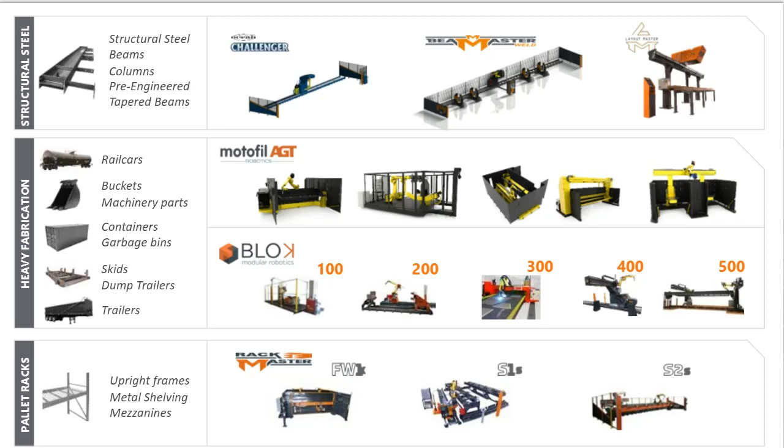Globally, we have over 1,000 work cells installed and running, and our primary install base is here in the US and in Canada. We also have systems that are installed and operating in Mexico and in Europe, Australia, New Zealand, and we also have a system operating in Japan. Currently, we are 85 plus employees based in the two facilities in Trois-Rivières and in Montreal, as well as a few here in the US, and we're always looking for new, good employees.

So with that introduction, I'm going to start into conversation about the LAYOUTMASTER. Again, our augmented reality solution for structural profile assembly. So unlike some of the other solutions you may have seen, we are not using robots to populate components onto a main profile. Material handling isn't the challenge for most of our customers.

In fact, we've been told the biggest challenge in fitting is finding people that know how to use a measuring tape and how to interpret a drawing. So we looked at the solution from a different way. Let's reduce the skill set requirement but maintain the flexibility that a human brings to the table when it comes to the fitting operation. And that's what drove the development and creation of the LAYOUTMASTER. What is a LAYOUTMASTER?

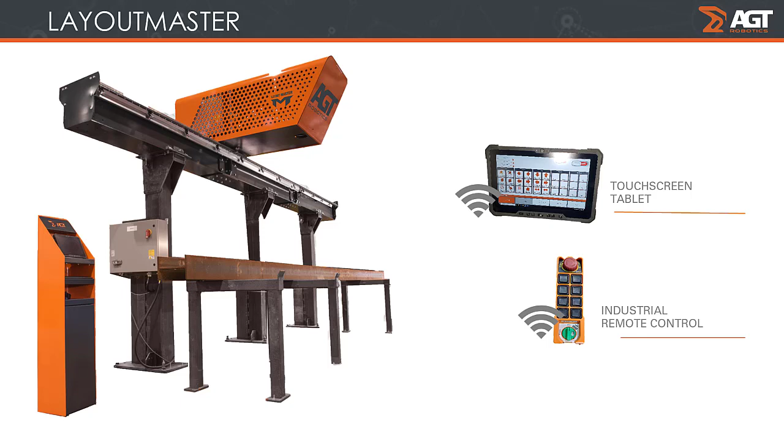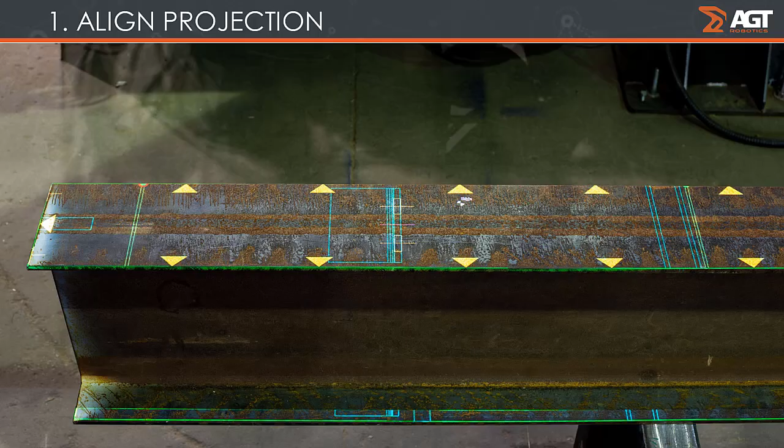So, how does it work? There are essentially 3 steps involved in fitting using the LAYOUTMASTER. The first step is to take the information from your SDS2 software package, import it into our Cortex software, and it creates the projectable information.

You set your beam profile in place somewhere within the projection area of the LAYOUTMASTER. It doesn't necessarily have to be precise, but in the interest of speed, if you can have the component located within a few inches of a datum location, that really helps.

Then the operator projects the registration information. He uses this to align the projector with the profile. You can see here this series of yellow triangles — this is the projected information. This is not painted on; this is actually the laser projection as it hits the surface of the material.

He's got the datum end located. He's got the side edges of the flange located. Whatever information is required to orient the projector to the main profile for the first face to be fitted, this is where that's being done. He very simply jogs the projector to make everything line up with his beam.

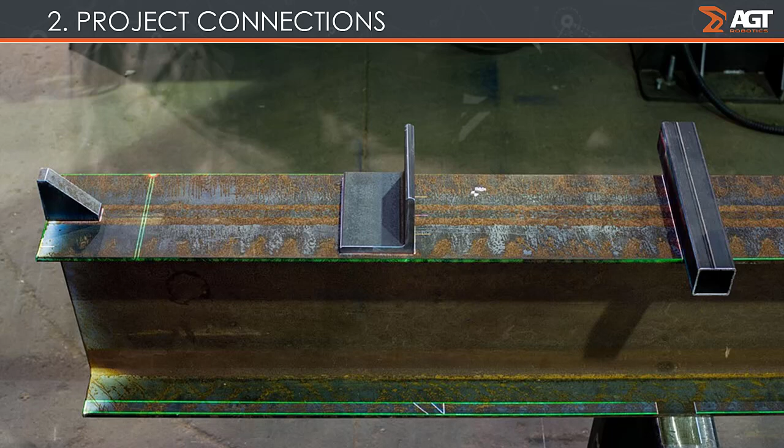Once that's done, he pushes the button on the operator control to say next accessory. You can see here how the information for the location of those accessories is then projected not only onto the workpiece, but also onto the accessories themselves. So we can see the landing point for these components, as well as the 3D images showing where the other lines should be in the real world.

Once he's got that information, he simply tacks the component in place and moves on to the next one.

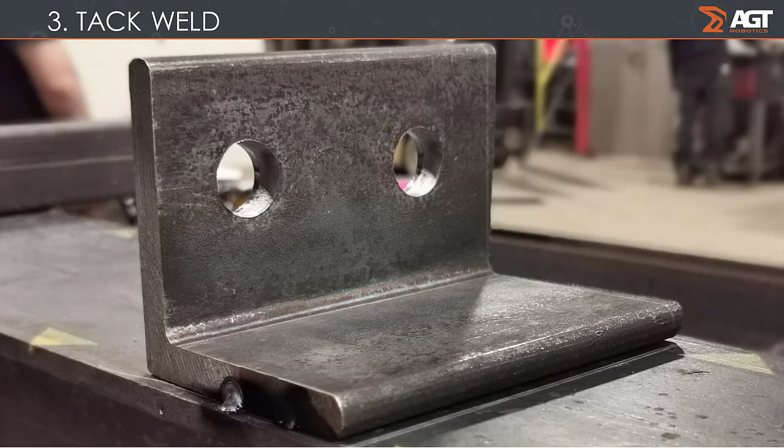The kinds of information that we can project include, as we saw earlier, the information required for locating and registering the main profile, whether that's a W profile, an angle, a channel, or an HSS tube. It doesn't matter, we can produce all of those edges and details in the projection.

We can also project holes, either shown or hidden holes, to give reference information for the operator. In terms of connections, we can show where the connections actually land on the main profile surface. We can show connections on connections, something that would be very difficult to do in the real world using a drawing and conventional measurement techniques.

And as we saw, we can also show all the edges of all the profiles to make sure that we've got very accurate placement of those components on the main beam.

For hole information, we can show the location of holes, we can show center lines of those holes, and we can also show center lines of hole patterns, again for accurate representation and reference information.

In addition to all that, we can show detailed part information. This really helps the operator make sure he gets the right part in the right place. We can show information like a part number, a description of the part, dimensions of the part, and even the physical weight of the part to make sure the operator has all the cues he needs to confirm he's got the right component in the right place.

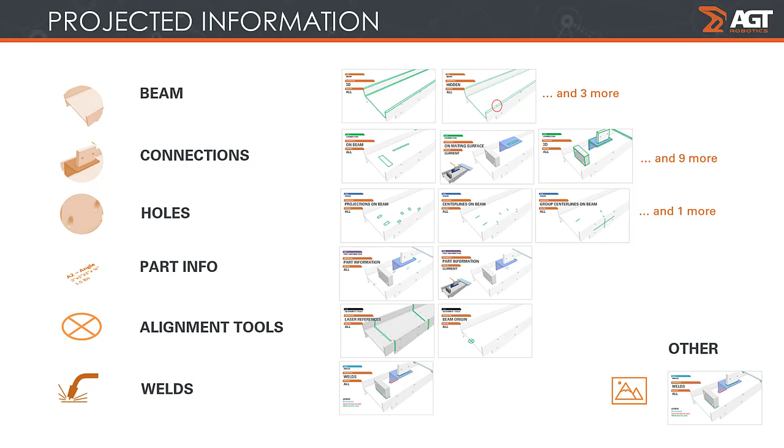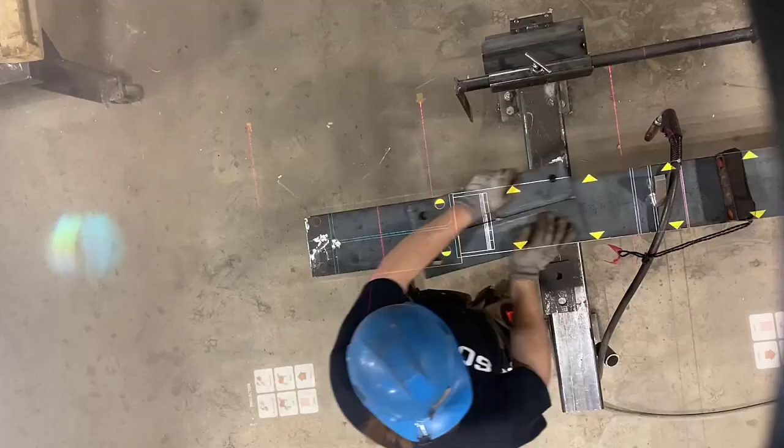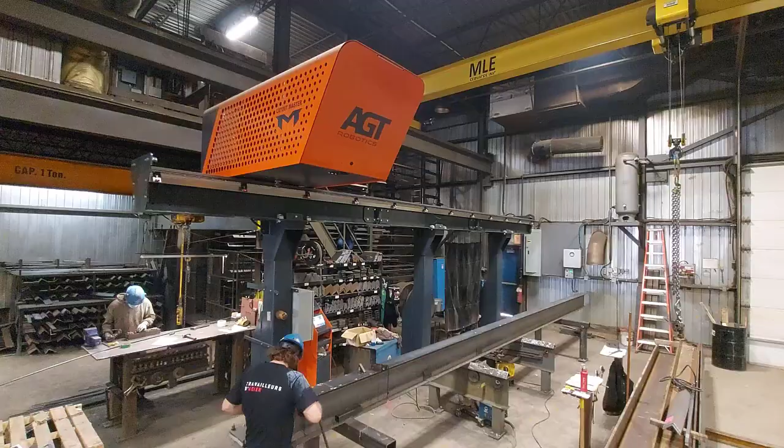Here we see a LAYOUTMASTER being used in a customer shop. Basically, profiles are being presented on trestles. An interesting capability of the system is the ability to lay out some of the accessory parts, in this case an end plate. The customer was able to lay out the center line for the location of the web and also the top line where it's going to hit the flange, and he didn't have to use a drawing or refer to any measuring tape.

He just did it all with the LAYOUTMASTER. Now he's got that in place, and he's already gone forward with locating and tacking the gusset. He's got an angle plate here, and again all he's doing is pushing the button to say next accessory on his remote control. The projector then identifies the location, projecting the information for that assembly, and he just has to get it located between the lines, tack it in place, and move on to the next one. It's a very simple, very fast operation with lots of visual cues for the operator to make sure he's got the part in the right place at the right time.

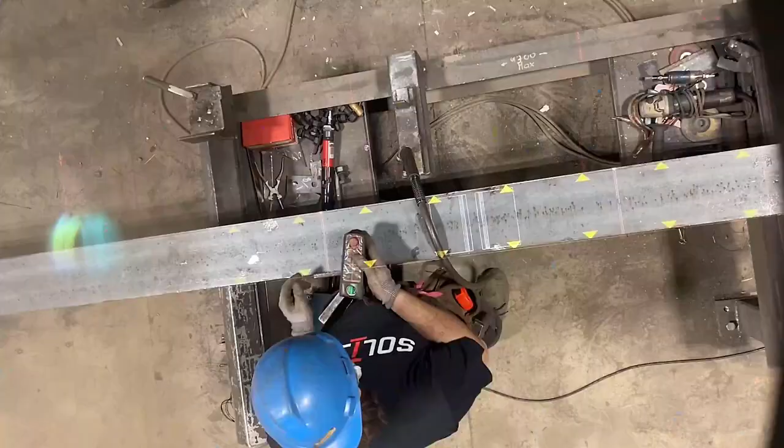This operation, where he's welding this angle in place - I actually saw him in a previous version of this video where the tack shrank and pulled the part out of place. He was able to visually see that because the entire component was highlighted by the laser projection. He basically knocked the tacks off and retacked it in the right position - a great way to make sure that you are sending properly fit components to the field.

And he just works his way down the beam profile until he has accomplished all of his fitting requirements. And that's pretty much it for the LAYOUTMASTER. So we'll jump right into the BEAMMASTER at this point.

The BEAMMASTER is AGT's solution for robotic welding in structural steel. We're kind of proud of the BEAMMASTER in that in 2019 we were awarded the Global Innovation Award by FANUC Robotics, our robot supplier. FANUC is the largest supplier of robotic welding and industrial robots on the planet. We were awarded this Global Innovation Award based on the unique capabilities of the BEAMMASTER to take the details from a CAD detailing package like SDS2 and translate that into robot path and robot welding parameters without the need for any human intervention.

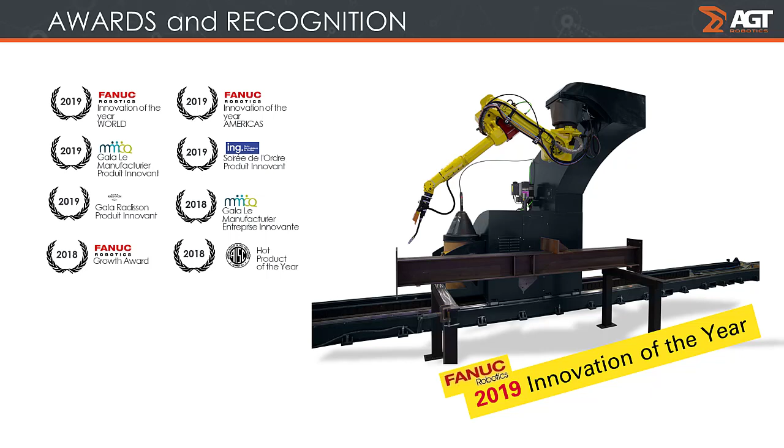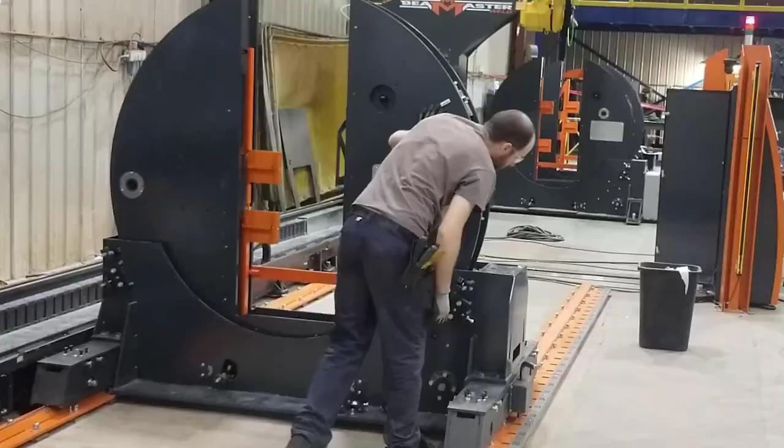Here's a quick video showing the BEAMMASTER at work. Essentially an industrial welding robot equipped with a welding package on a long linear rail and a set of movable rotators that allows us to present the customer parts in the horizontal plane for welding.

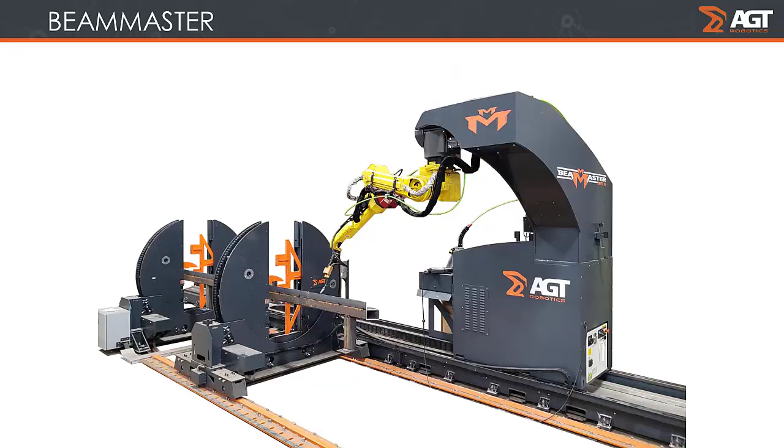So what is the BEAMMASTER? Well, as you saw in the video, we have a FANUC industrial robot equipped with a Lincoln 450 amp power supply, mounted on a long floor-mounted linear rail. It allows us to access long lengths of components and also gives us the ability to work in two zones, as we'll see as we move forward.

The robot is supported by a set of rotators, which allow us to clamp profiles up to 20 inches in the flange dimension and 48 inches in the web dimension, with a total of 10,000 pound payload per pair of rails. One of the rotators is fixed, and it's the datum for the beam welding. The other rotator is located on a movable rail, which allows us to reposition it to accommodate shorter or longer lengths of beam profiles.

It also allows us to move the rotator if our Cortex software package finds that the clamping is going to interfere with an accessory that needs to be welded.

This is a typical configuration for the BEAMMASTER. As I mentioned, there are two zones, which allow the robot to work unimpeded in one zone while an operator is unloading a welded part and reloading a fresh part to be welded by the robot when complete. This way, the robot is constantly working and we're not waiting for an operator to load or unload components.

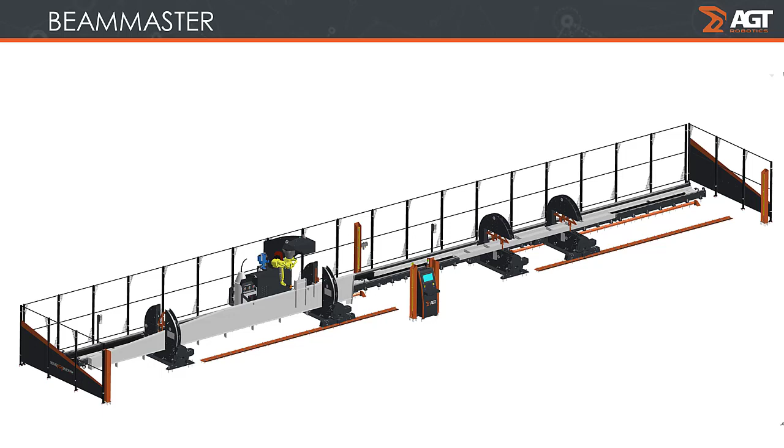There are four pretty simple steps to operating the BEAMMASTER. Number one is exporting your CAD details to our Cortex software. It's essentially a few mouse clicks to set up the export format, and once you hit OK, it's exported to Cortex.

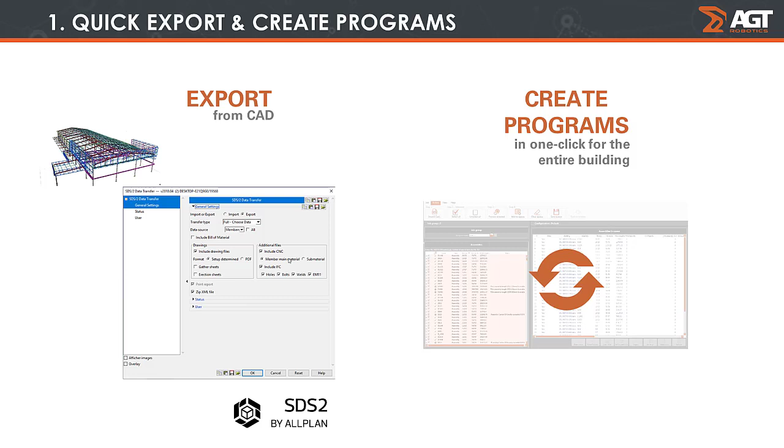In this case, we're showing exporting an entire building, and that can be done in one click. All the details from that building can be exported at once, and Cortex will go to work analyzing the beam content of that building and start creating the welding programs.

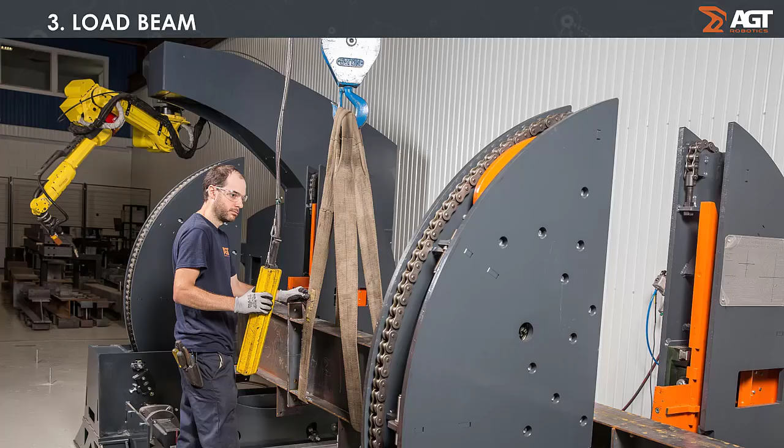The operator then selects one of those programs from a drop-down menu on his operating station, picking one that matches the assortment of beams lined up to be welded. He loads that beam, either vertically, as seen here with the rotators oriented in this direction, or horizontally using a combi lift, forklift, or a horizontal conveyor. Once he's loaded it up and clamped, the robot goes to work.

As I mentioned earlier, all of the welding is performed in the horizontal plane, and that's what we're using the robot to do—orienting the part on four different faces during the process of welding the component.

So what makes the BEAMMASTER really unique is AGT's Cortex solution for no programming. Cortex is a software package we've been developing over the past 10 years to automatically generate the programs a robot needs to weld one-off components, if required.

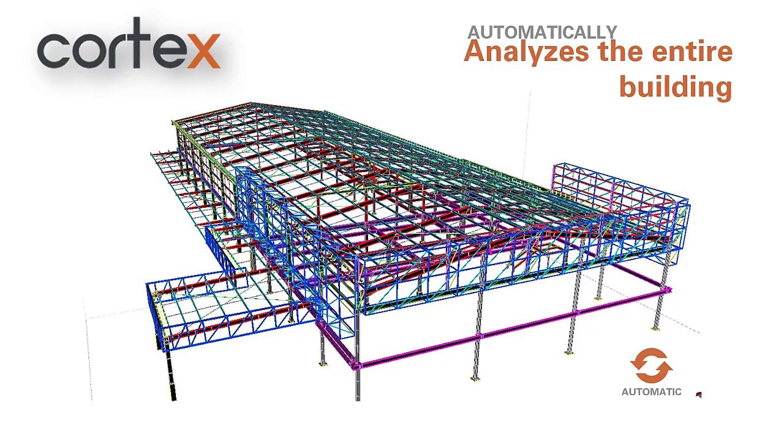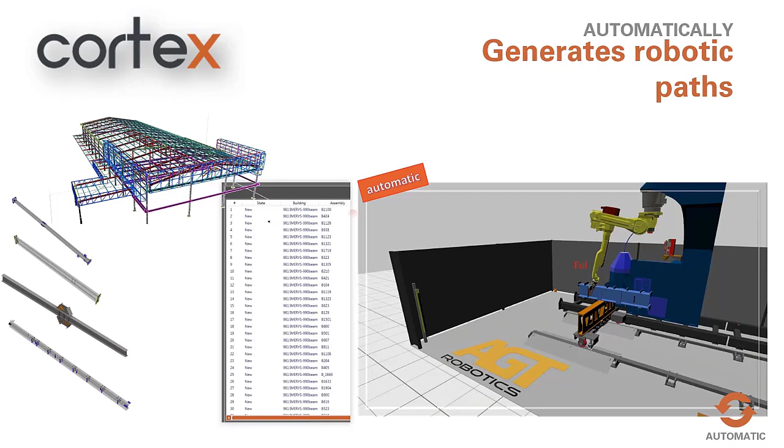In this short slide transition, we'll show you how that works. We automatically analyze the entire building. Once the export from SDS2 has been made, we identify all the unique parts in there. We discard any parts that don't require welding, or that are too small, too big, or too heavy to go into the BEAMMASTER. Once we've selected the appropriate candidates, Cortex goes to work.

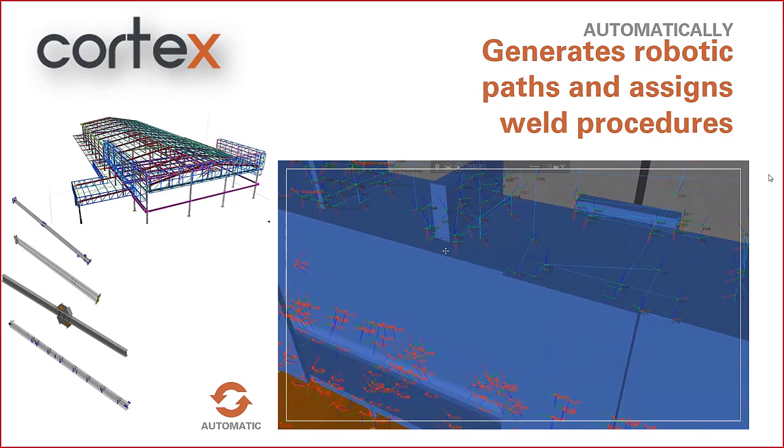Cortex starts generating simulations for all of the parts in that building. This looks like a sped-up video, but it actually represents the simulation process the robot goes through to create the robot paths and welding parameters. Essentially, it's doing in minutes what would take many hours by conventional methods.

Once it's done, it generates point clouds—collections of positions for every beam in that building—and creates a real-time simulation you can view after the program's been generated. These programs are what's uploaded to the robot controller, and the robot plays them back in production.

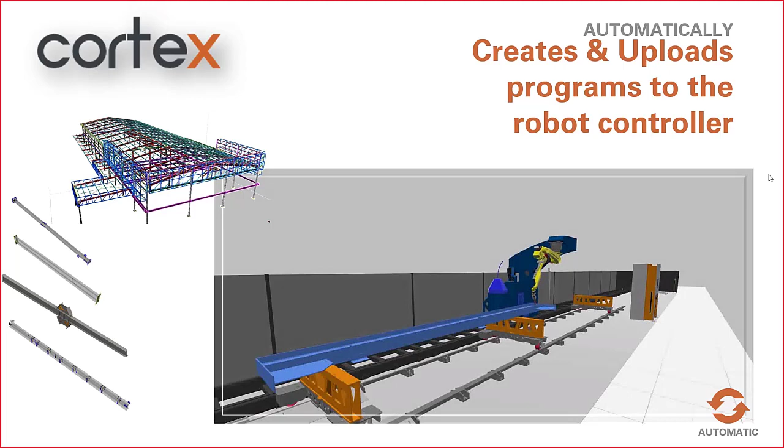This also makes sure that we have a good idea of what the real time is going to be to weld a part prior to actually producing it.

So we talk about Cortex as the no-programming solution—no human required, no problem, really. As opposed to the easy-program or offline programming solutions you may see out there, we feel Cortex represents the only true no-programming solution. This is important because we don't want you to trade a skilled welder for a skilled robot programmer.

We're hoping that we know that we can teach your existing resource to be able to use the system effectively and capably. So the progression in terms of programming has been from manual programming, where we're using a teach pendant to program point by point, to what we call assisted programming or lead-through programming. This is being used on smaller parts where you might have repeats of 6 to 10 or 20, where the programming time investment is worth it.

Offline programming takes the programming requirements from the teach pendant and puts them into a computer somewhere at a desk outside of the robot work envelope. This is great to allow the robot to continue to work while you program new parts, but it isn't much faster than the manual programming method, so it's still a laborious process.

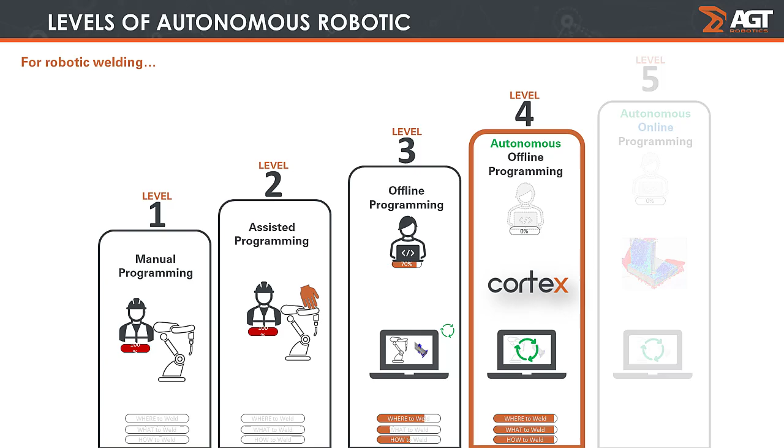So now we're going to talk a little bit about fitting and welding. What happens when you combine the two and create a complete fitting and welding solution? When you add a LAYOUTMASTER to a BEAMMASTER, you end up with an integrated fitting and welding solution that can allow an operator to do the same kind of work as up to 8 fitters and welders. The two systems work in conjunction together to make sure that one operator is able to produce the fitting requirements, the robot's generating the welding requirements on a single shift of between 6 to 8 operators.

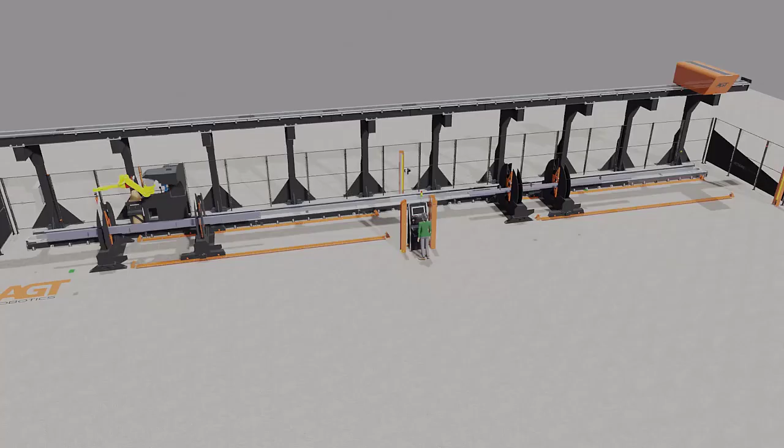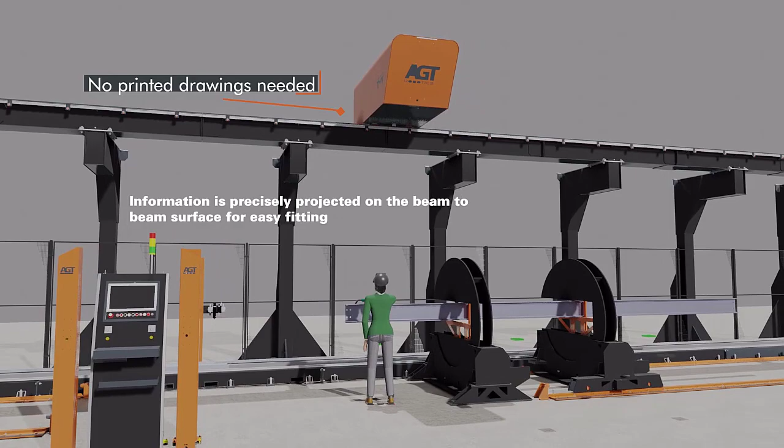Here's a little video describing how this works. The operator sets the robot in motion in the left-hand zone while they go to work on the right-hand zone to do the fitting. So they've loaded a raw profile in the rotators. They're now matching the stiffeners and clips, whatever end plates, whatever accessories need to be tacked in place using the LAYOUTMASTER while the welding is going on in the other zone.

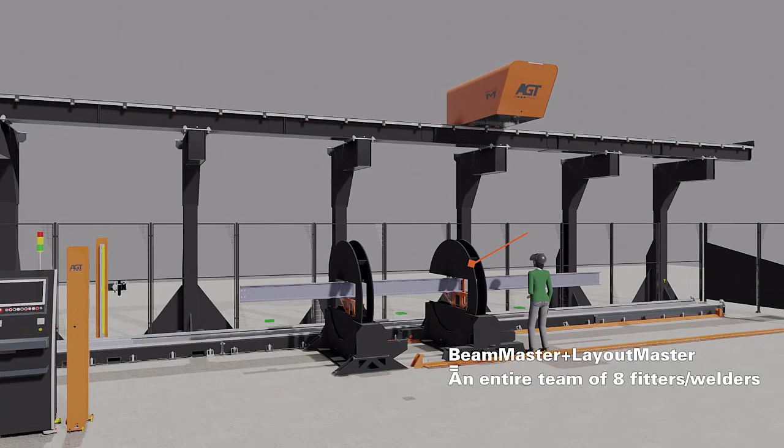Another advantage of this solution is that you've reduced non-essential material handling a great deal because you only handle the main profile once, from the time you load the raw profile on the rotator until the time the robot has completed the welding operation. So significant reduction in material handling time. Once the fitting operation is complete, the LAYOUTMASTER and the robot exchange ends and go to work in opposite zones.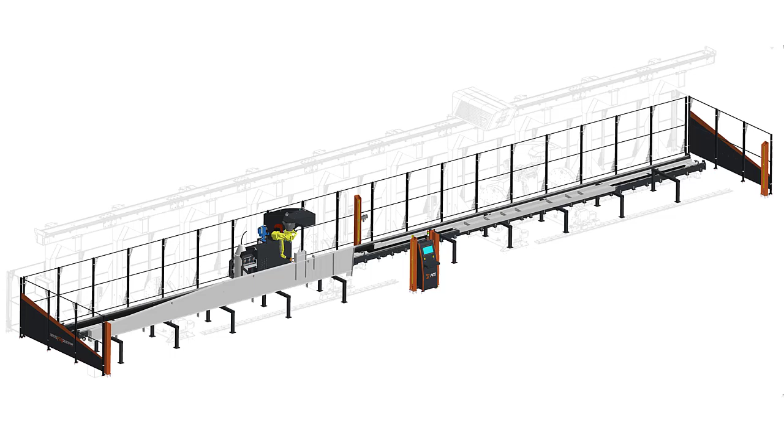The two systems are designed to be modular and to work together as standalone solutions or be augmented in the future. So for example, you can start out with a basic BEAMMASTER solution without rotators and just do your material handling manually. You can add rotators to create the automated solution we saw in the video. You can then add a LAYOUTMASTER to give you the ability to do layout and robotic welding in the same zone, the same solution. And if your parts are long enough or welding intensive enough, you can add a second robot to virtually double the output of your system.

Again, the systems are designed to be modular, so you can start with a LAYOUTMASTER on its own, or you can start with a BEAMMASTER on its own and add the other system at a future date as required.

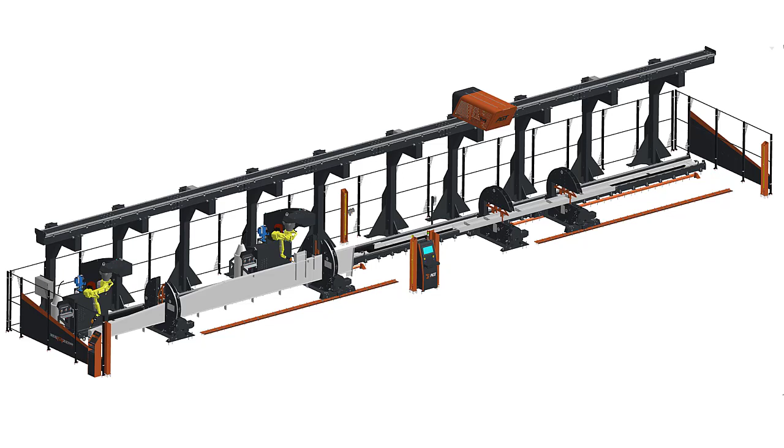So in summary, we feel there are 7 really good reasons why a structural fabricator should consider one of our solutions for structural steel. It's a simple solution. The technology is easily understood by your existing resources, both from an operational perspective and a maintenance perspective.

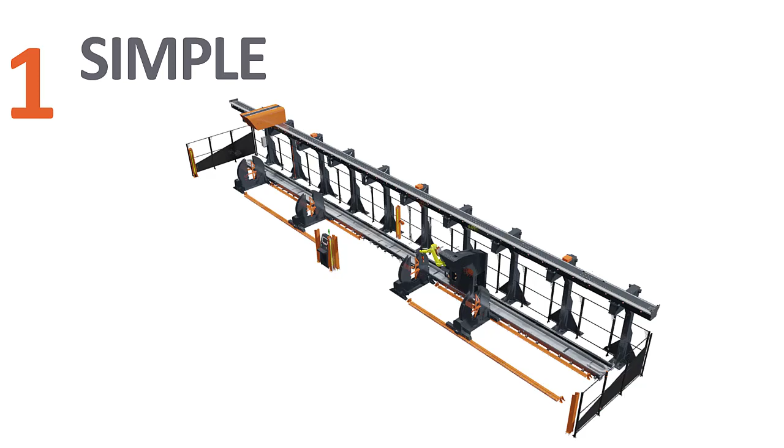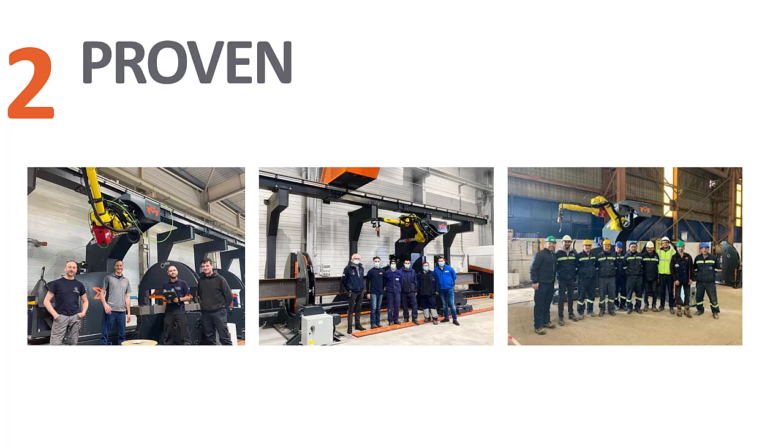It's proven in customer shops around the world with over 70 sales to date. Don't just take our word for it. If you look on LinkedIn, you'll see plenty of posts from our customers that are bragging about their welding quality or about their productivity.

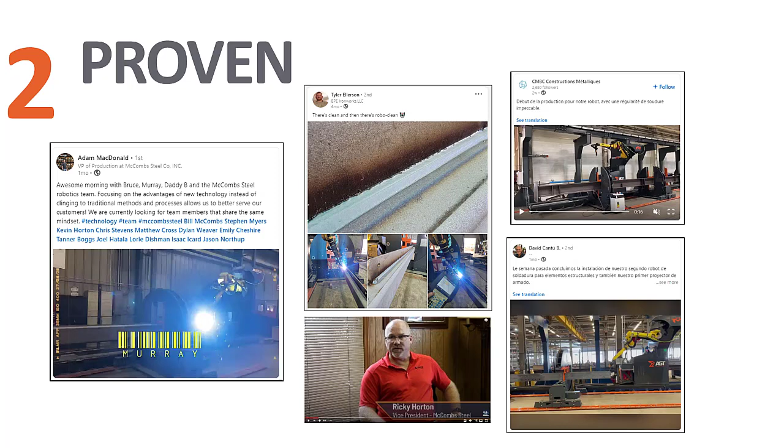And I think this should have been the #1 reason, no programming. This is really what makes our solution significantly faster and easier to use and unique in terms of the other solutions on the market today. By giving you the ability to take your CAD details from SDS2 and automatically create robot programs and robot welding parameters, it's a significant competitive advantage for you.

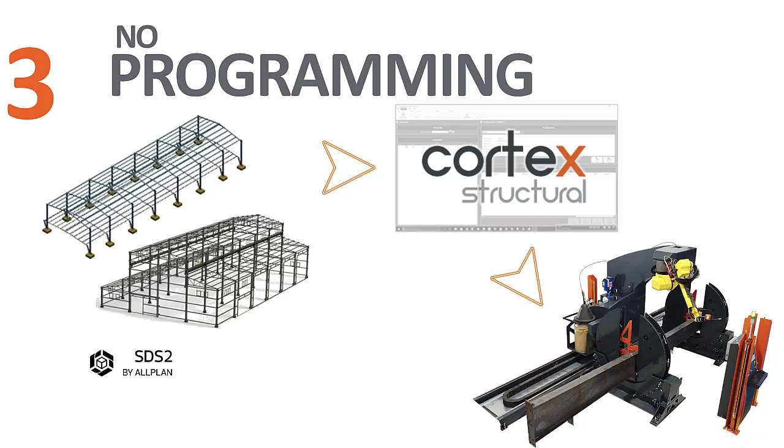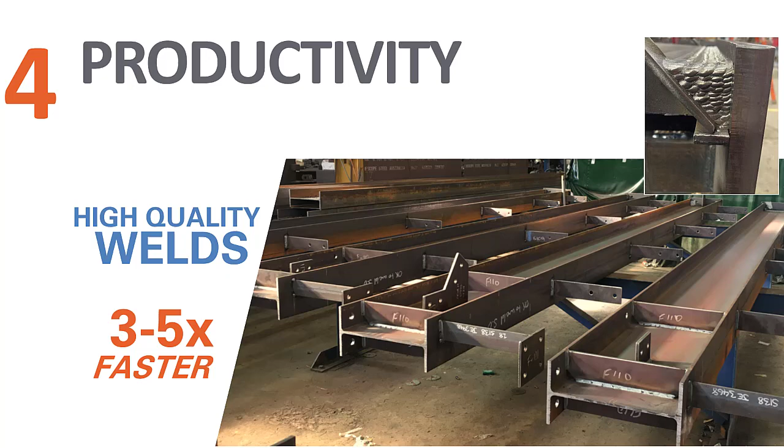The BEAMMASTER solution is also very versatile. So not only can it handle mill profiles in terms of W profiles, H-beams, HSS tubes, angles, channels, but it also can handle fabricated beams, whether they're straight or tapered or have dual tapers. So a very popular solution for our clients in the pre-engineered building world. But in addition to that, the BEAMMASTER is also a conventional welding robot on a rail. So we have helped clients in the structural industry to weld other assemblies that may be structural in nature, but don't necessarily fit the operating envelope of our positioners.

In this case, a client used one of our BEAMMASTER solutions to weld a series of I-beams onto a deck plate, saving him over 20 hours of welding time per assembly. So it may not be programmed fully automatically, but again, it's a welding robot, and we have helped customers to create automated solutions for some odd weldments that come through their shop.

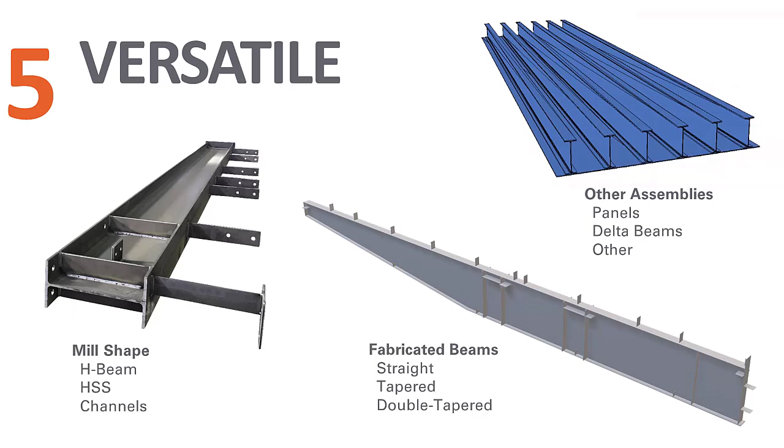The BEAMMASTER LAYOUTMASTER combination is really an automation solution that's optimized for floor space. And when we look at our customer shops today, we see that not many of them have wide open spaces waiting to be occupied by very, very large welding systems. So we occupy about 1/5 of the floor space of some of the typical systems that are seen out there today. And within that floor space, if you're using a combined system of a LAYOUTMASTER and a BEAMMASTER, that floor space is generating the same output as 2 fitting bays and 4 welding bays. So it is very space effective.

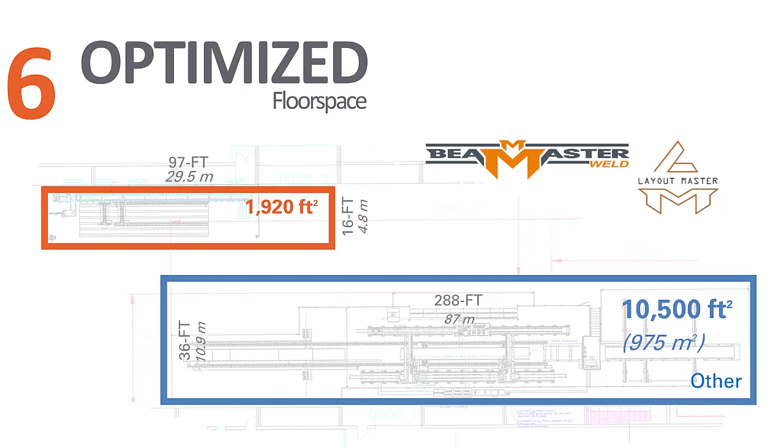And last but not least is service. Don't trust us, ask our customers. AGT prides itself in having world-class service. Again, great tools to communicate with your team in real time online, to talk them through the issues they're having with the system. And also great documentation, which is always available to your team because we have it published online. It's not going to be locked up in the maintenance supervisor's office at night when somebody needs to refer to it. It's always available to the operator on the HMI or on a computer someplace, ready to be accessed when required. And that brings me to the end of our formal presentation.